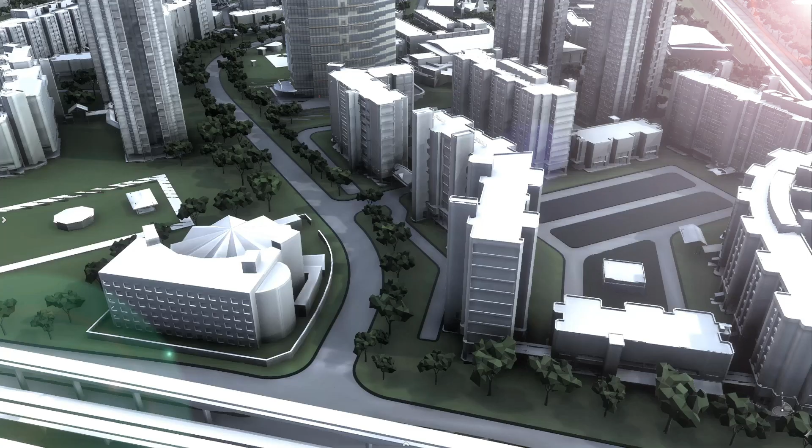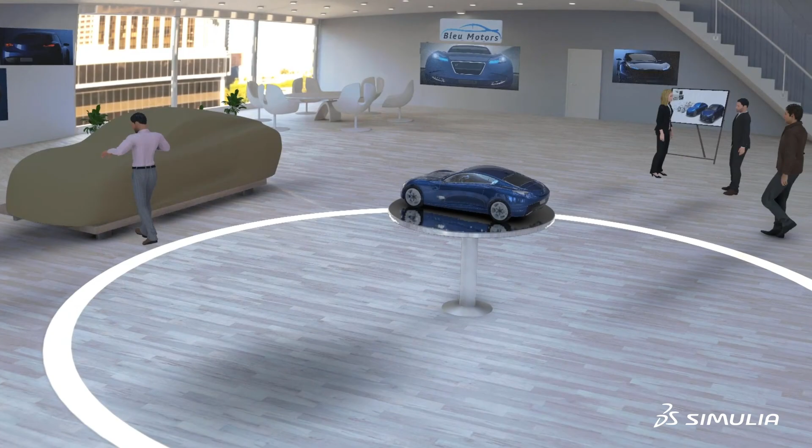Bleu Motors is a vibrant startup planning to showcase their first car in the upcoming auto show.

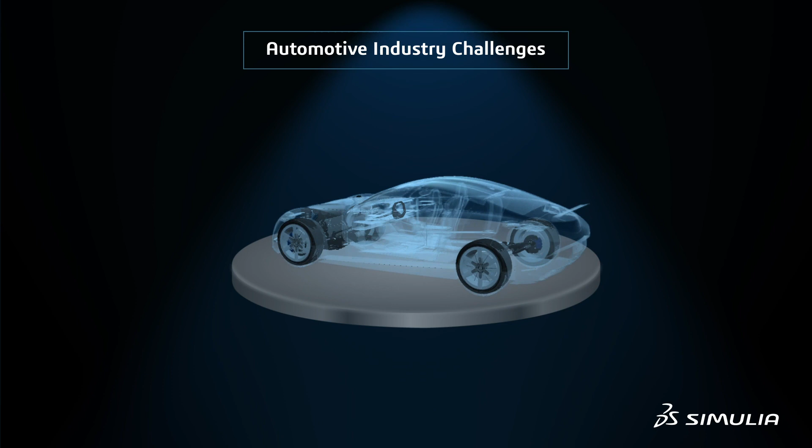In order to stand out in the highly competitive automotive market, companies need to minimize physical tests and prototypes, manage vehicle configurations, and validate controller interactions.

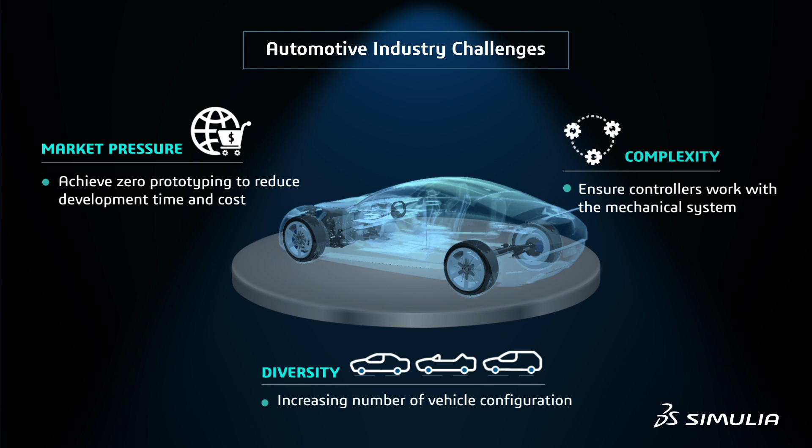Based on the market research, the strategy team decided to design a car that would differentiate in terms of ride, handling, drivability, NVH, and durability.

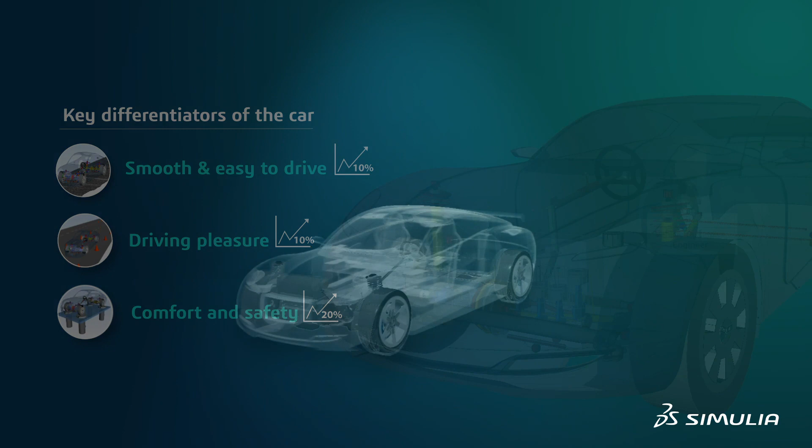To meet these objectives, an engineering team with Joe and Emily was formed, who are vehicle dynamics engineers. Emily also created a dedicated community for this project to collect and share the know how.

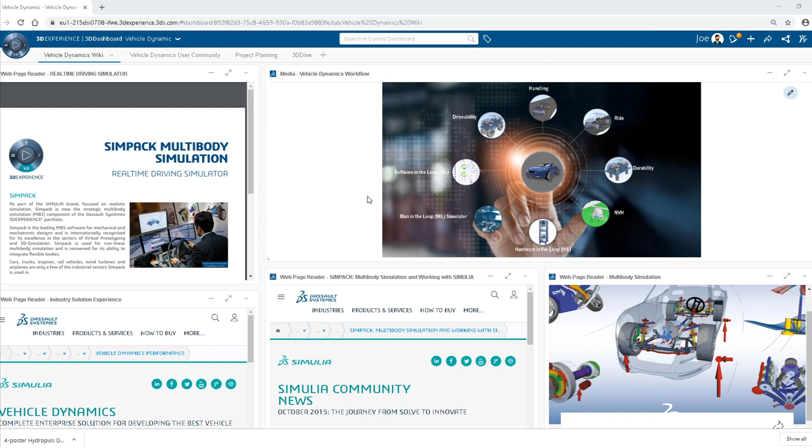Using the project planning app, Emily created a project scope. This helped her to plan, execute, and monitor the project efficiently.

Emily created a database, which is a library of all the systems in a car, and stored it on the 3DDrive. The team identified several workflows for improving the dynamics performance.

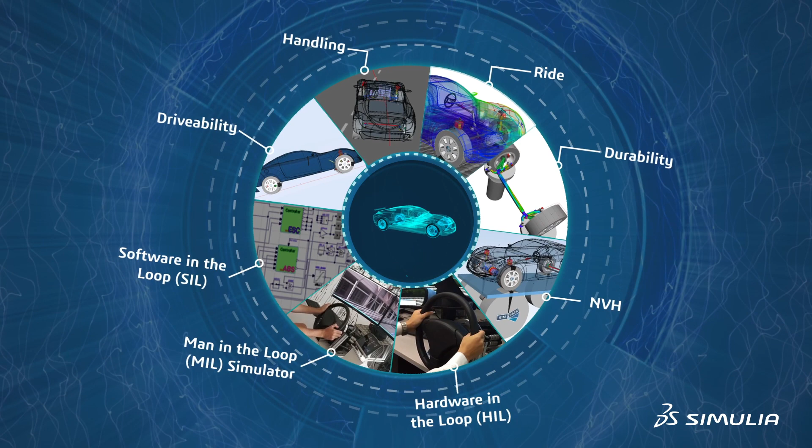Since there are multiple workflows, Joe chose the tire model as per the load case. For the ride and durability workflows, he created flexible bodies for BIW and rear subframe. For NVH performance, the detailed powertrain was chosen.

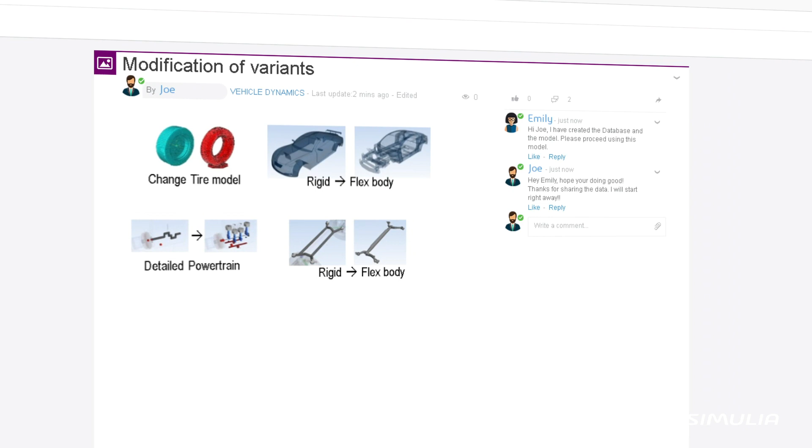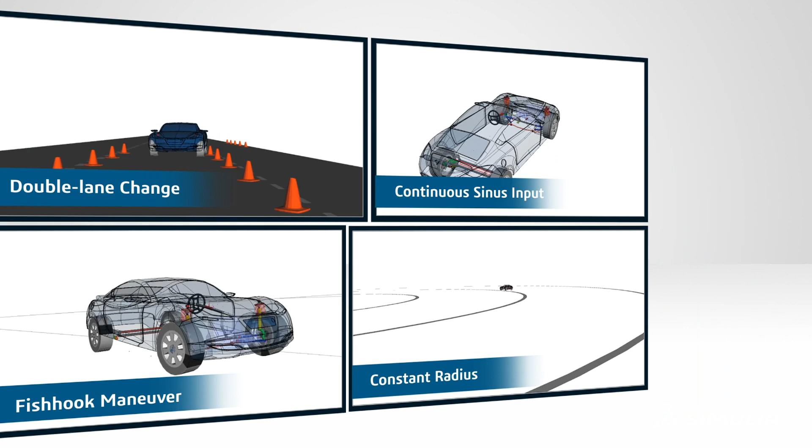We performed 4 handling load cases. To reduce the body roll, different tire models were tested. Hard tires reduced the body roll by 10%, making the car fun to drive.

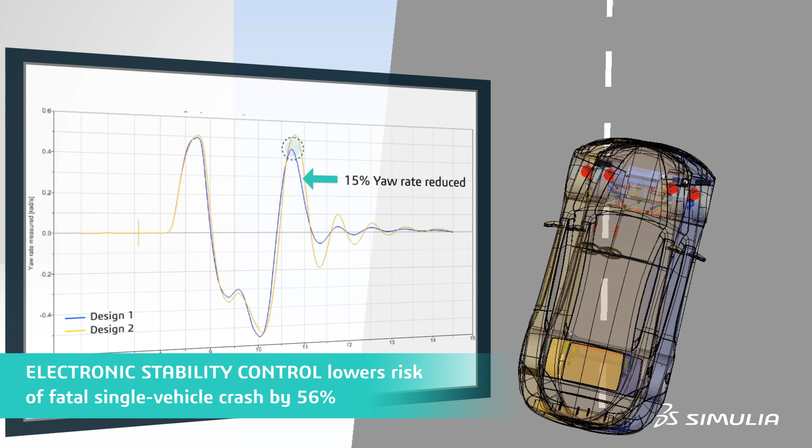Electronic stability control can lower the risk of fatal single vehicle crash by 56%. We simulated the blue car with ESC and found that the car with ESC was much more stable while turning than the one without it. The 4-poster virtual test showed high stresses in the rear subframe.

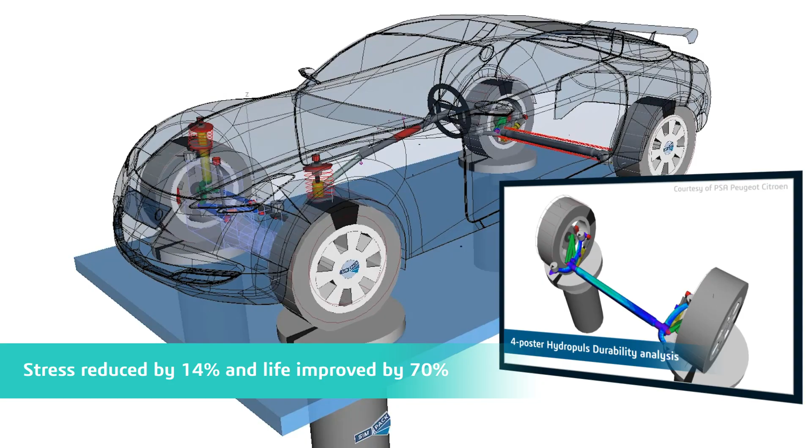The modified design improved the life by 70%.

To eliminate gear rattle, we worked on the transmission system. We tuned the dual mass flywheel, which helped to minimize the engine torque irregularities. Improved half-shaft design reduced the vehicle jerks during gear change, giving better drivability.

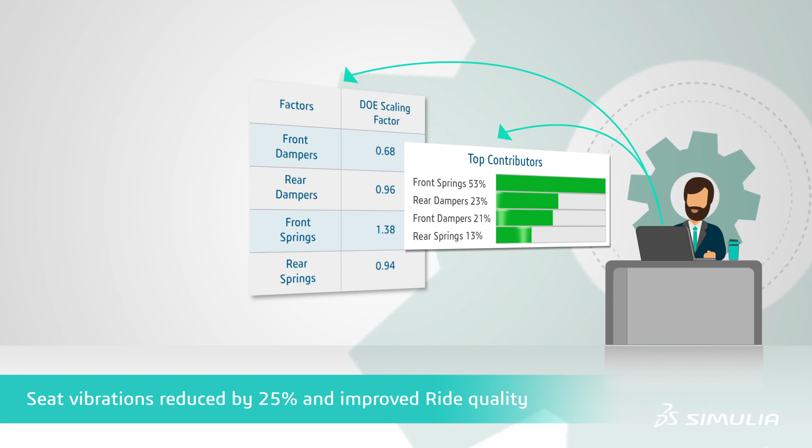The low-quality ride caused by seat vibrations can lead to fatigue. The solution was to work on tuning the suspension system. We did the design of experiment study and reduced the seat vibrations by 25%.

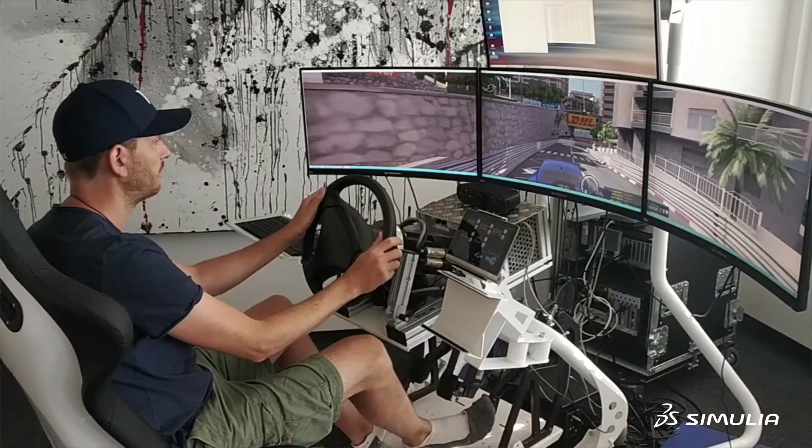The master model was finalized with all the modifications for the best possible dynamics. To validate the model, we used a digital twin of Monaco circuit on the real-time simulator. Joe drove the blue car and was very happy with the performance.

The team was very happy to see the progress. Emily shared the data with the vehicle program team. With the final design, the car was manufactured. And now, after all that hard work, it's time to go for a long drive.